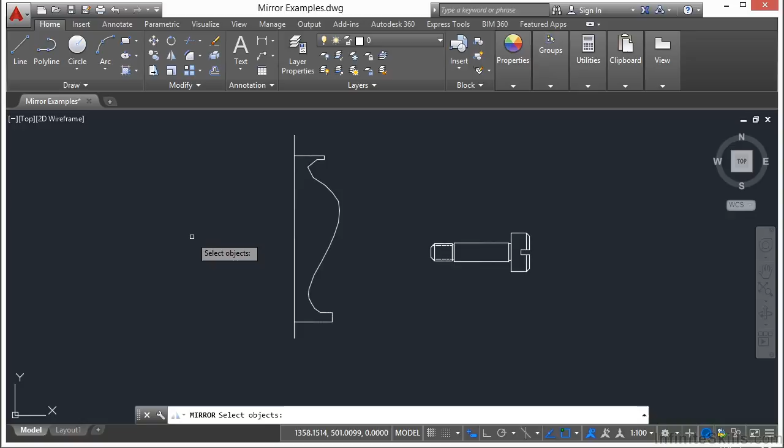Then you can come up to the Home tab on the ribbon, go to the Modify panel, and then go to the mirror command. Start the command. Select your objects. We're going to select this half of the vase. You can pick one object or you can pick multiple objects. Press return. And now you have to create a mirror line. We have to pick 2 points. These points will create this imaginary line that your objects are going to be mirrored on.

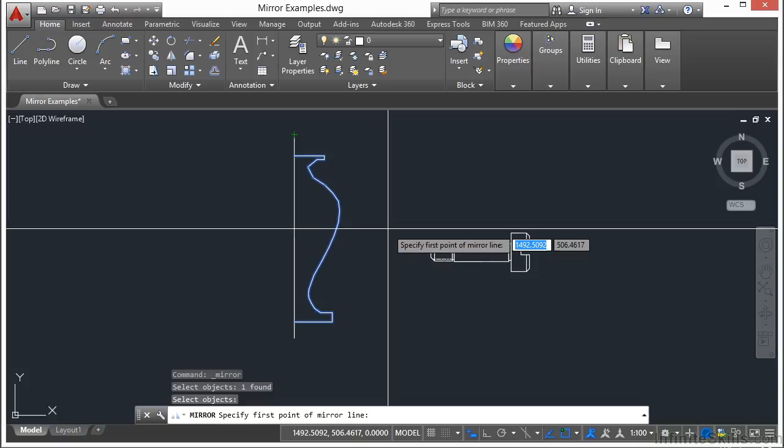In the case of the vase, I've put a construction line drawn in here already to help us out so we can see what we're doing. But you don't have to have a physical line drawn in there. Sometimes, though, it does help you to get a better understanding of the process and to help better define exactly where you need to mirror about. So in this case, I'm going to start off by selecting the top of the line.

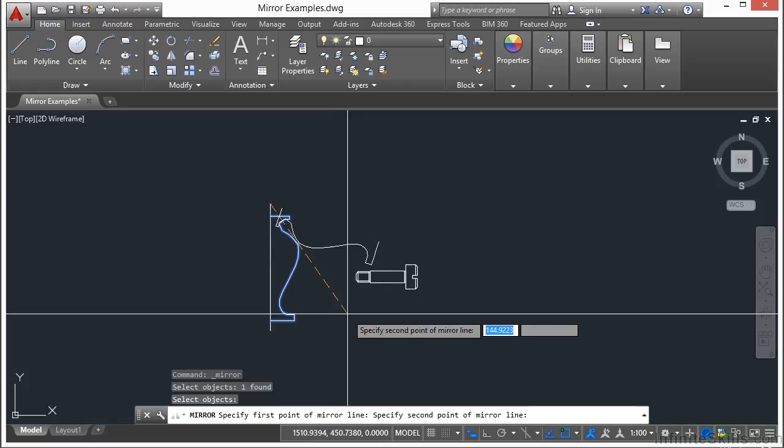And as you can see here, I have a bit of a preview. And you can kind of see how this is all going to come into place. So I have my mirror line, which is that dash line. I just have to pick a second point. So you can use the mirror command actually to be a sort of a rotate command in a way. And I've done that before. With this little preview, I'm going to now pick somewhere else along this line.

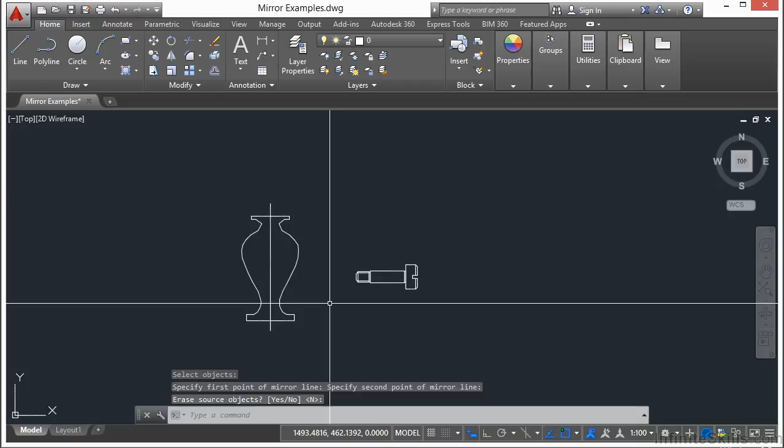And now you're given an option. If I want to erase the source object, that means this right half that I've selected will be gone. It'll delete that. I'm going to say no because I want to create my entire vase and make sure it's symmetrical. Just press enter. And here you go. Now if I select that line and I delete it, you can get a better look. There's a vase and it's completely symmetrical.

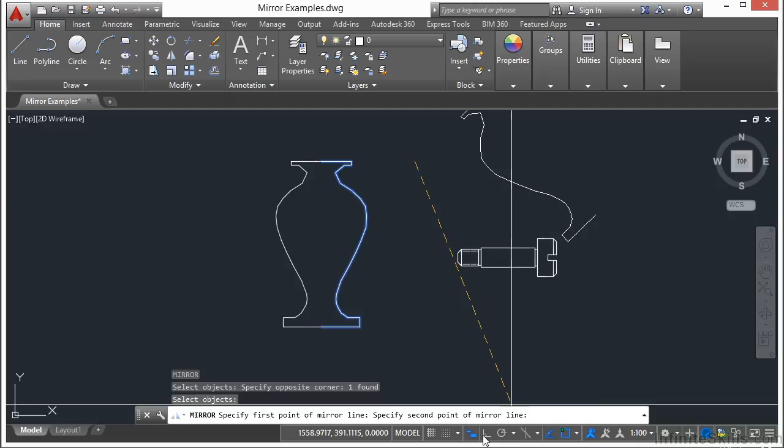Now if I start the mirror command again and I select one of these halves, press enter, I can pick anywhere that I want. And it's going to mirror my object for me. Now remember, I can turn on ortho, and that will help me to lock in my line work to be completely vertical. And this will give you a few different options.

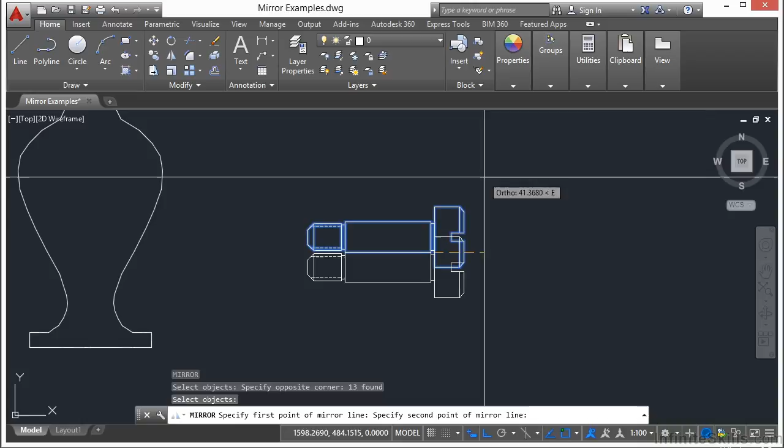So let's take a look here at this shoulder bolt or screw. This time I'm going to use the erase option. So I want the head of the bolt to be over here on the left. So I'm going to start the mirror command. I'm going to select all of these objects, press return, and I'm going to just pick the midpoint of this line, and my ortho is on right now, so I can just come straight up like this, and I'm going to go up to the top.

And now I'm going to tell it yes to erase the source objects. And there you go. So I did a kind of rotation with the mirror command. I just flipped it over. So my old bolt is gone, and now my new one is facing the proper way.